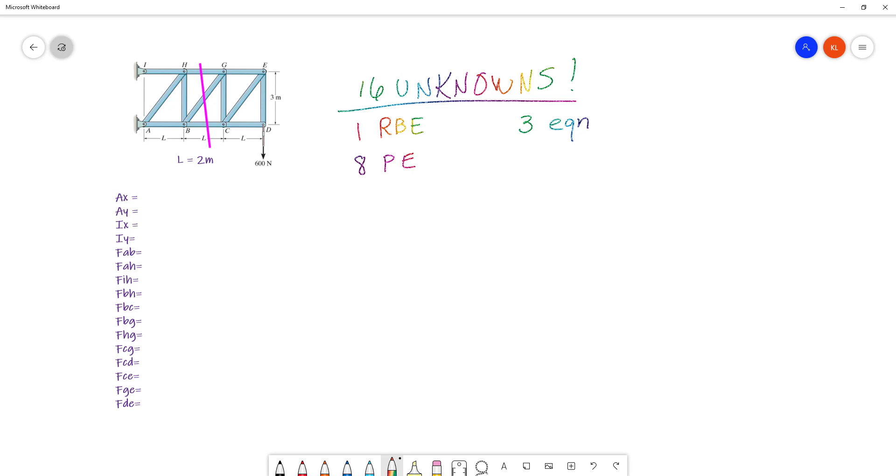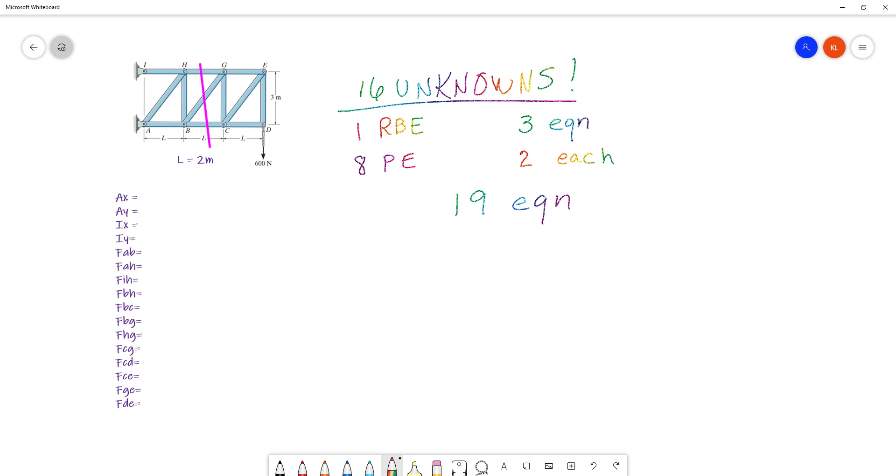And there are 8 different joints. So we can write 8 particle equilibrium sets of equations, which each solve for 2 equations each, which gives us a total possible 19 equations to solve for our 16 unknowns. So we should be able to do this, but we got a lot of work to do. I'm going to start drawing the rigid body of the entire truss and solve for the reactions that I can get.

Here's the free body diagram for the entire truss. The pin forces at A and I are shown, the applied 600 newtons, the necessary dimensions for any moment calculations, and we've added a coordinate system for the entire solution. I'm noticing right away that I've got 4 unknowns, and luckily the joint I can really be helpful as I get into solving my reactions.

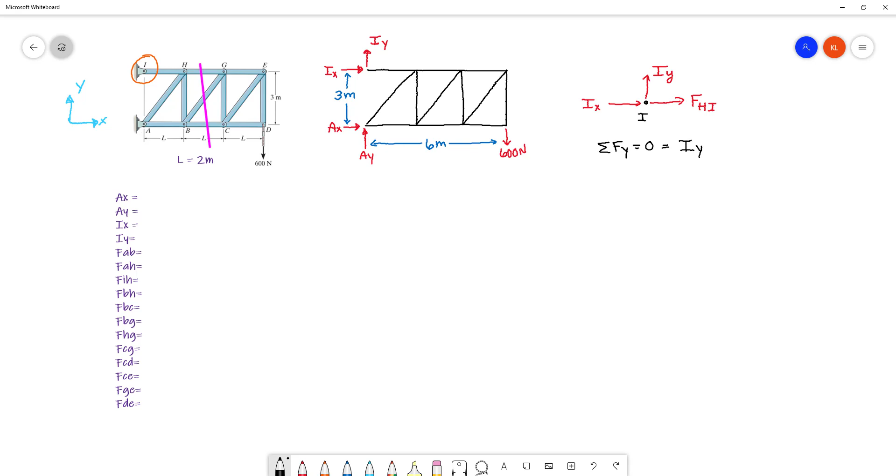And perhaps this was obvious, but IY has to be 0 in order for joint I to be in equilibrium. We'll prove that. So the only way for this to work is IY to equal 0. Now when I go back to the entire truss rigid body, I have 3 unknowns. That finishes off the reactions for the entire truss.

While we've already got joint I drawn, let's finish up joint I and solve for the force in HI. So we see that the force in HI, or IH, is 1200 newtons in tension. Now that I've completed all of this work, I'm going to reset the screen and we'll jump down to joint A to take a look at our next 2 components.

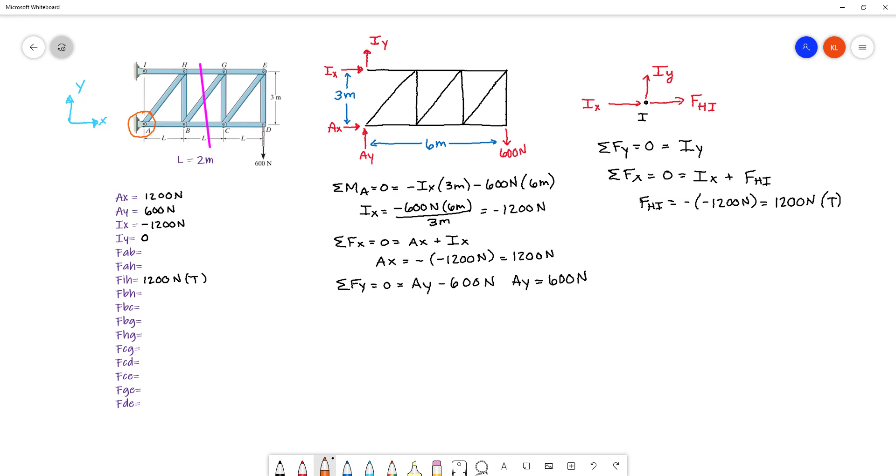At joint A, we have AY, which we've already solved, so I'll write that with the numerical values. I like to have a sense of what's known and what's unknown, so I like to write in the numbers I know so I can confirm that all I'm left with is 2 unknowns.

At this point, I realize I'm missing an angle. So I need this information about theta. And I'm going to use that in a couple of locations. So I'll set that up over here. Tangent of theta will equal 3 over 2. Theta equals 56.3 if I take the inverse tangent. So both of the forces that we solved for ended up being in compression.

Next, we'll go to joint H. Here we already have some information. We know the force in IH is in tension. We know the force in AH is in compression. We don't know the force in HB. And we don't know the force in HG.

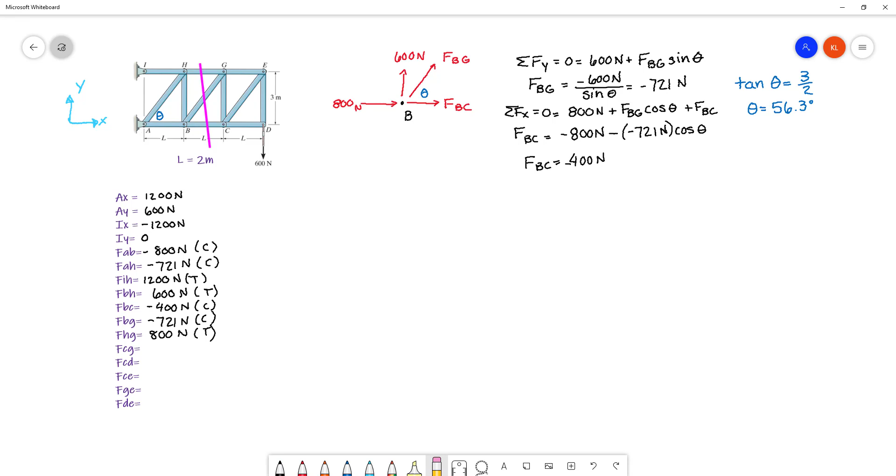So we have FBC is minus 400 newtons. That is in compression. And we have the force in BG is minus 721 newtons in compression. Time to move on to joint G. Okay, I have two knowns and two unknowns. Time to write the equations of equilibrium.

So the force in GE is 400 newtons in tension, and the force in GC, or CG, is 600 newtons in tension. We're starting to see a theme here. Across the top, we have a lot of components in tension. Across the bottom, we have a lot of components in compression. And that's pretty standard for a truss with essentially some weight loads applied to it.

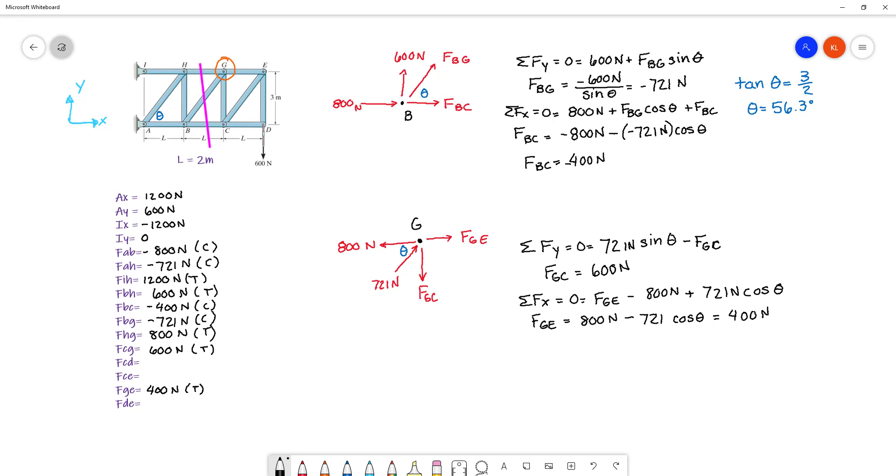Now's a good time to kind of collect where we're at. So let's go back and just take a look at what we've solved for already. We have the force in IH, HA, AB, BH, HG, BG, BC. We also have CG, and the ones that we have left to do are CD, CE, oh, and we have GE. So we have a couple of options from here as to where we go next. We can go to joint C, we can go to joint E. Looking at this, joint C has 4 components, joint E has 3. So I'll take a look at joint E next.

Okay, so 2 unknowns. Let's set up our equations. Okay, so we can fill in 2 of our last 3. FDE is 600 newtons in tension, and FCE is 721 newtons, and that's compression. The last one is the force in CD. We can add the 600 in here from the force in DE, and we see that confirms the solution. Hopefully this is obvious, but sum of forces in X equals 0. And that's the force in CD.

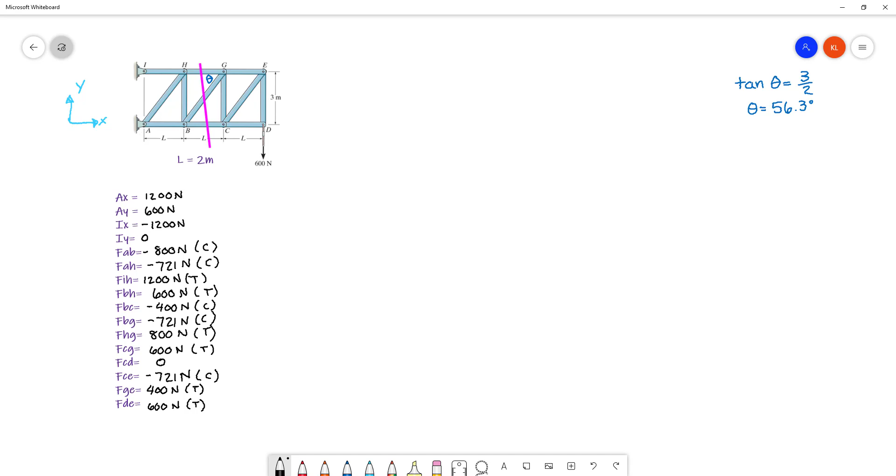Okay, clear screen. Let's jump into a method of sections to solve this problem. We've already identified the reactions at the pins, and that would be your first step for a method of sections problem as well. We've identified where we are interested in knowing. We need to know HG, BG, and BC, and we've already identified where that cut would go. So next we'll draw the right side of the cut. When I make this isolation of the right side of the cut, I select this because I don't need those input forces at A and I. All I need is the 600 newtons applied at D.

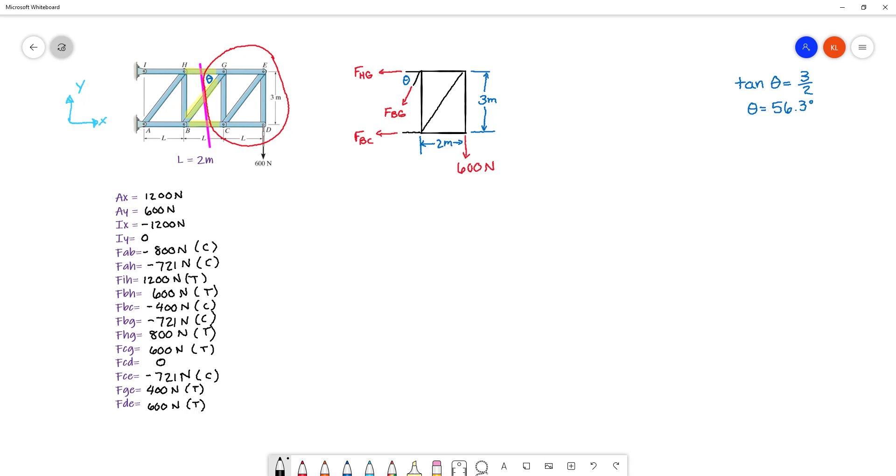And I like to show a little bit of the components that I've cut through. Not all of them, just a little bit. Add the forces. Right. With method of joints, we don't need distances, but for method of sections, we do. Because there's only one unknown force in the y direction, I'll sum forces in y. And we've solved for one of our unknowns. We still have two unknowns, so let's do a sum of moments.

If I'm going to sum moments about G, the reason I like looking at G is it's up here and it's a location where two forces intersect. B is also an acceptable point, but G is a nice one up here, and that'll allow me to solve for the force in BC. If I'm going to sum moments around G, to make this clearer to translate from the free body diagram to the equations, I'll write that on the free body diagram. Okay. Both the 600 and the force in BC cause clockwise rotation around the point G. Both the force in BG and HG intersect G. And we have that the force in BC is 400 newtons in compression.

Now we can write our sum of forces in X. And we've just confirmed all of FHG, FBC, and FBG. Right? We've confirmed those values that we found from the method of joints, but we did it with a single free body diagram. So if all that was necessary was the components through the center of this truss, method of sections is the way to go. If you need a lot of information throughout the entire truss, method of joints is the preferred way to go. I hope that helps.